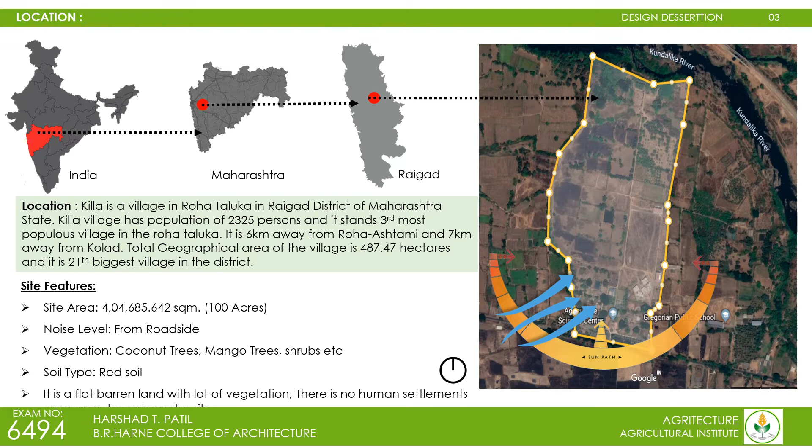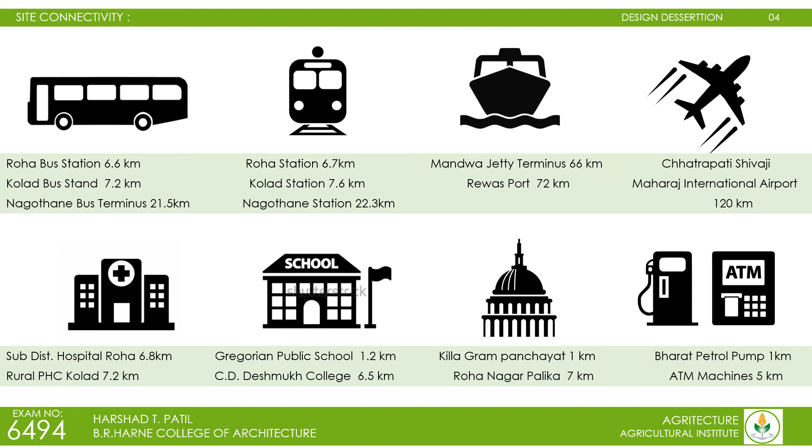Site features: site area is around 100 acres. Coconut trees, mango trees and gulmohar trees are found on site. It is a flat land with a gentle slope towards the river. Killa is well connected by roadway and railway. Roha bus stand is 6.6 kilometers and Kolad bus stand is 7.2 kilometers. Roha railway station is 6.7 kilometers and Kolad railway station is 7.6 kilometers.

Picture A shows the Roha Killa road which is covered with trees. In B, we can see the flat site with the trees on the edge. In C, we can see the Kundalika river. In D, the agriculture center beside the site. In E, the hall. And F, the poultry farming beside.

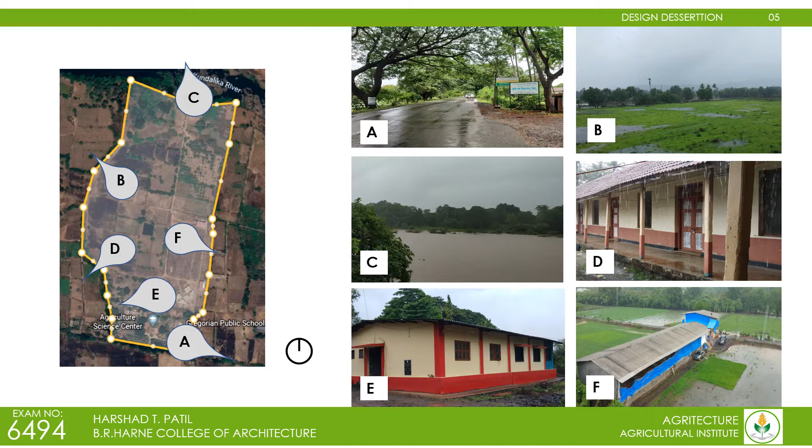Killa comes under the warm and humid climatic zone. Average summer temperature is 30.7 degrees Celsius. Annual rainfall is 3450 mm. Southwest to northeast is the wind direction. Red laterite soil is found on the site. SWOT analysis: plenty of water is the strength. Weakness is power supply and road networks. Opportunity is scope for development of education.

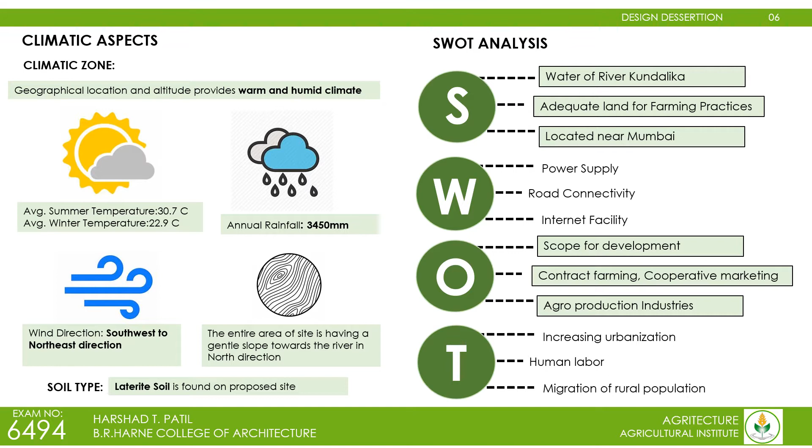According to the ICAR, Indian Council of Agricultural Research, 100 acres of land is needed to propose an agricultural institute. Of that, 33% is permissible for construction and 66.6% is permissible for farming. The 33% is divided into 70% built up area, 15% RG, 10% road and 5% amenities.

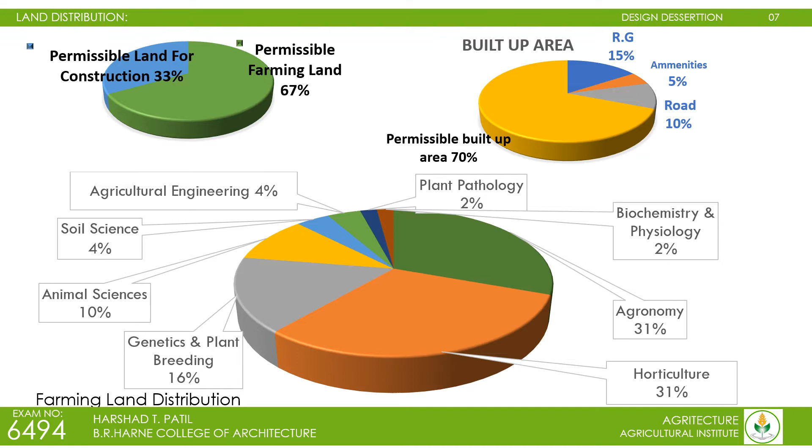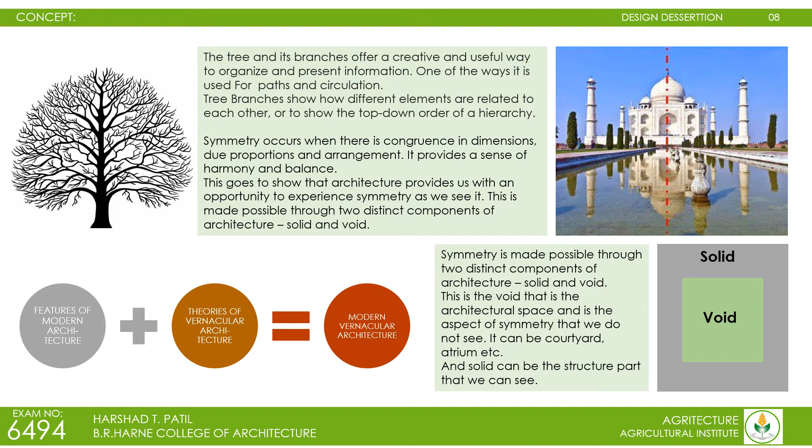Moving to concept: tree, symmetry and void. The circulation of food and water by means of capillary action in trees. The tree and its branches offer a creative and useful way to organize and present. The pathways and roadways depict the tree capillary action from roots to leaves. It shows that different elements are related and connected to each other. The roadways and structures are proposed in symmetry using voids. Hence, modern vernacular architecture has been proposed.

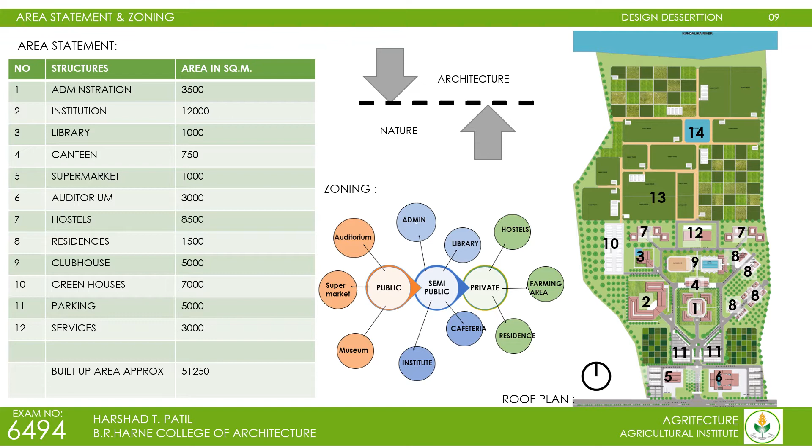Total built up area is 51,250 square meters. Zoning: the site is divided into three parts: public, semi-public and private. Public areas are auditorium, museum and supermarket. Both structures possess different entry exit points to avoid traffic congestion. The central road is the main road which takes us to the semi-public and further to the private areas of the site. The semi-public and private areas are well segregated by farms and parking spaces. The semi-public places consist of administration, institution, canteen, library, and the private spaces consist of hostels, residences, clubhouses, greenhouses, and the farms.

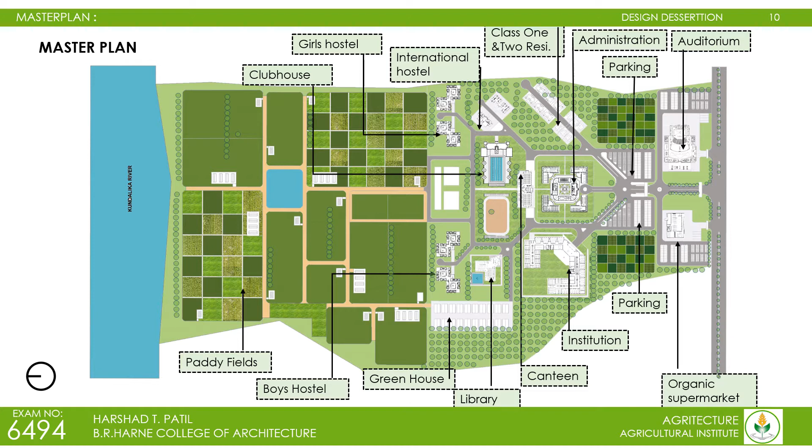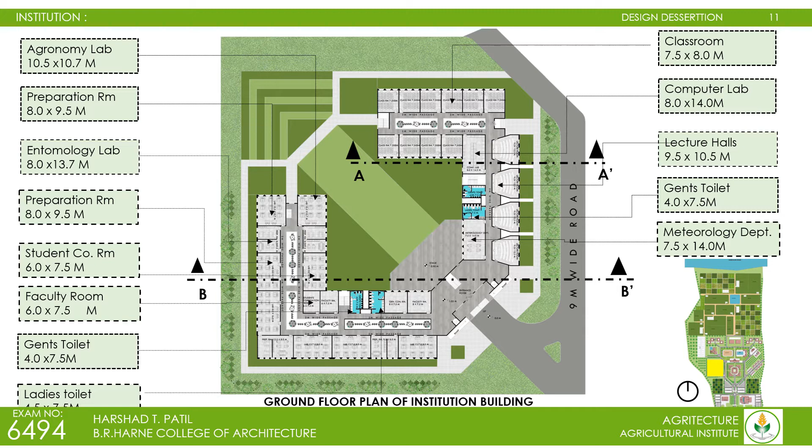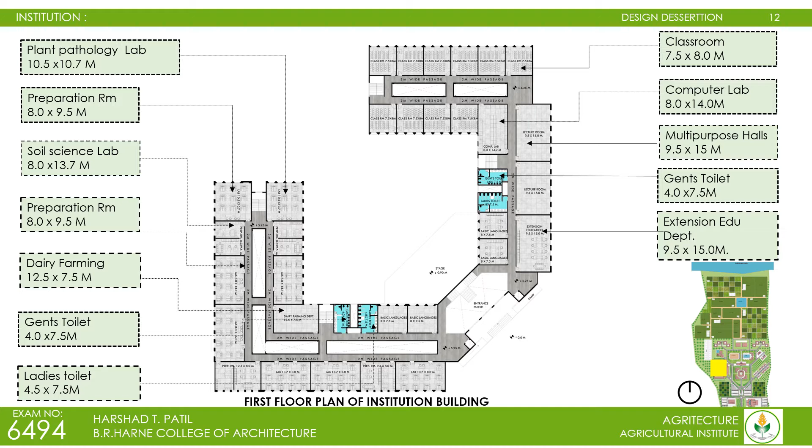Institute: it is east-west oriented with a grand double height entry at southwest. It is a ground plus one storey structure, covering about 12,000 square meters. The institute is composed of labs, classrooms, lecture halls, etc. A courtyard and central plaza have been carved out and serve as a multi-purpose area. Classrooms are proposed on the northern side with external treatment to avoid harsh light. Cross ventilation can be seen in the spaces. The lecture halls are replaced with multipurpose halls, and the extension education department has been added on the first floor.

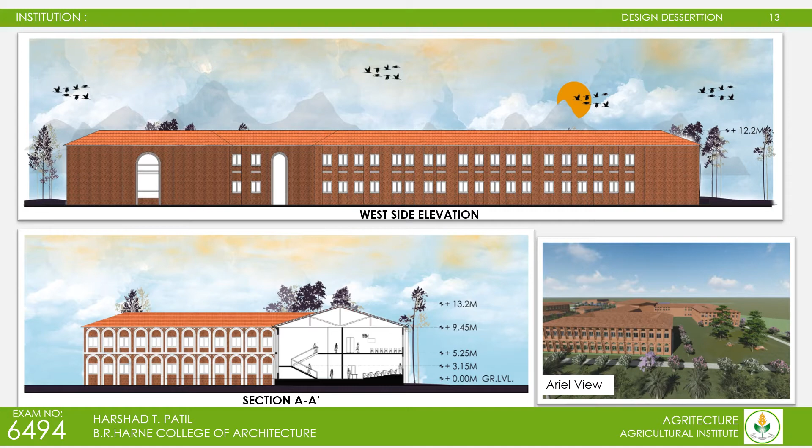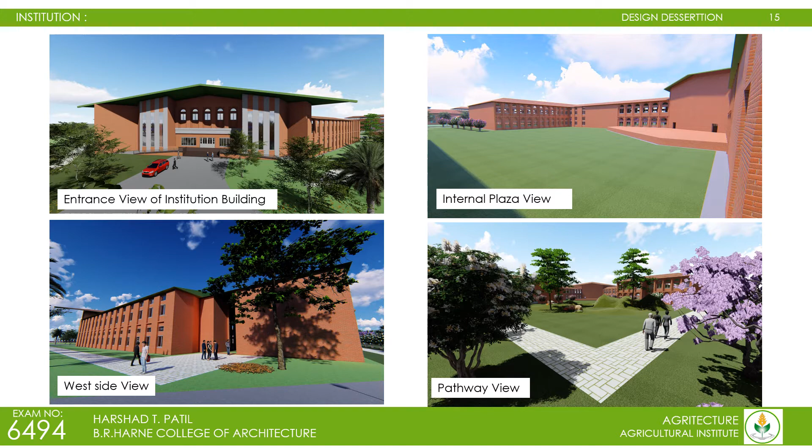It has been proposed on the central part of the site, the head of the institute. It covers about 3,500 square meters of area. It has a main tower type structure surrounded by 4 substructures. It is north-south oriented, parallel to the main highway. A courtyard has been carved out of the main building. The substructures are well connected with pathways, and the admin block is accessible on 3 sides by pedestrian walkway and 1 side by roadways. It is a ground plus 1 storey structure. It is symmetrically designed. Radial symmetry can be seen.

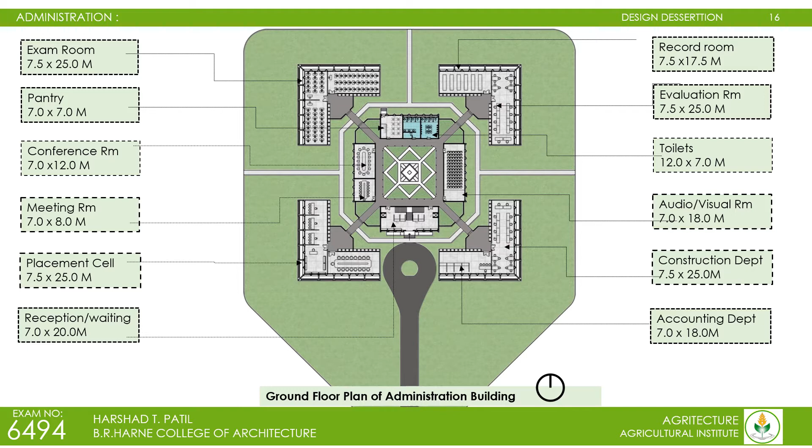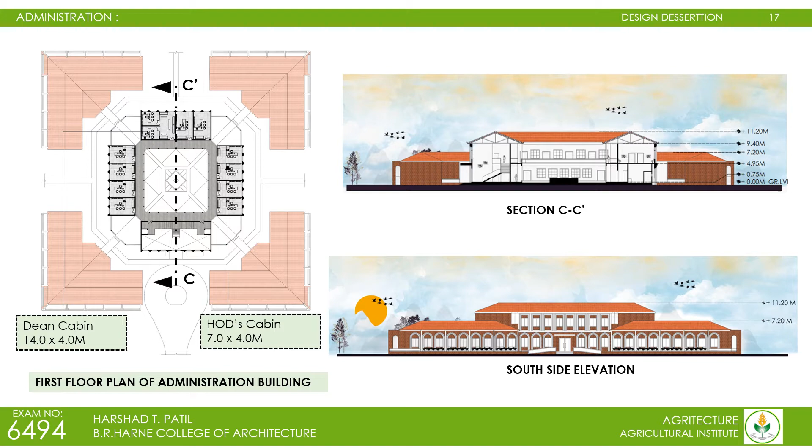Canteen is the next building, located centrally on the site. It is symmetrically designed. Lateral symmetry is seen, so it can be accessed from the east and west directions, with 2 entry and exit points. Outdoor seating has been provided in the outskirts with the landscape.

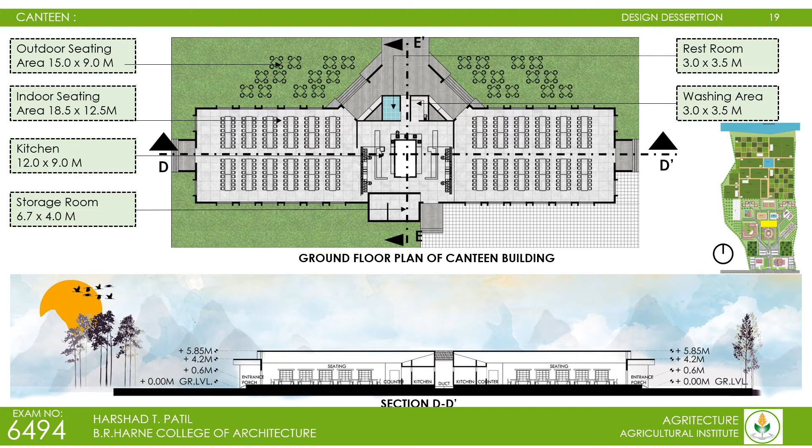The canteen covers an area of 750 square meters. It is a ground floor structure designed for about 600 students. It works on solar and biogas fuel. Traditional types of roofs have been proposed, and the chamfer at the end gives aesthetic beauty to the elevation. An enclosed duct has been given in the kitchen, which works as a natural chimney.

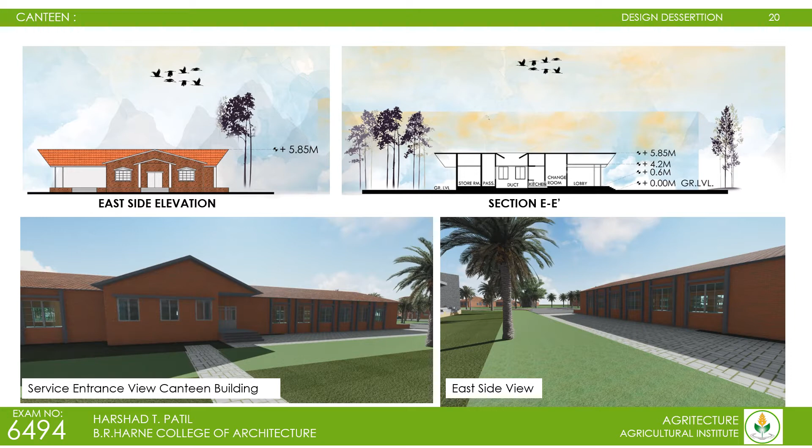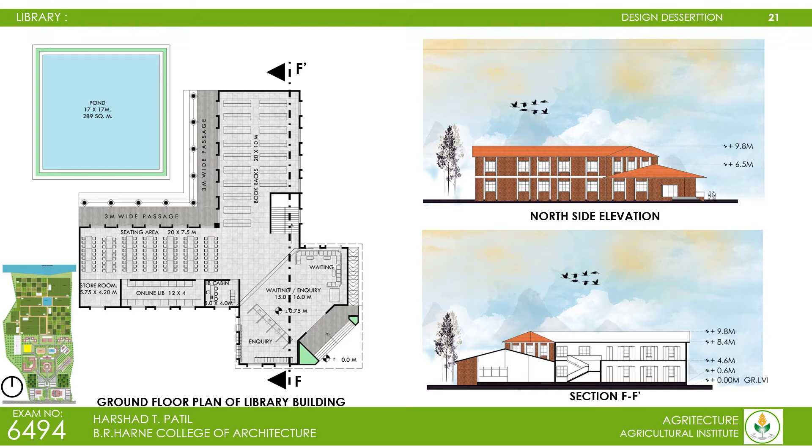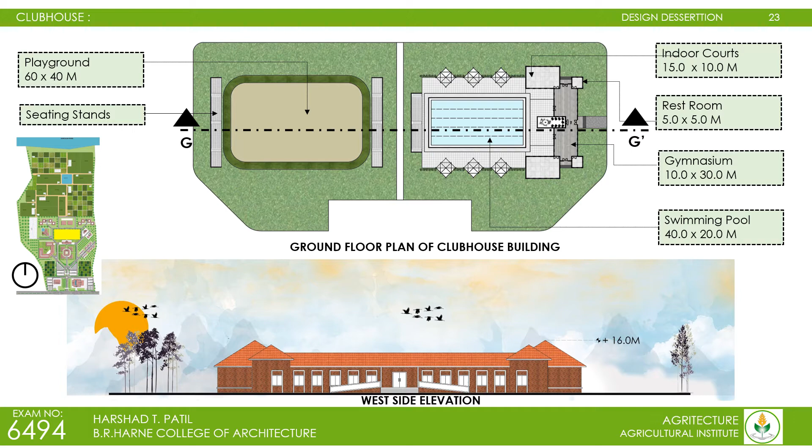Clubhouse is centrally located just behind the canteen building. The total built-up area of the clubhouse is 1000 square meters. It is an east-west oriented ground floor structure. Indoor games, court, and gymnasium have been provided. Seating stands have been introduced in the playground and swimming pools. Overall, to refresh the mind, the clubhouse has been designed in the space. Section GG shows us the stands, the swimming pool, and the clubhouse. Down there is the pathway view, the playground and stand view.

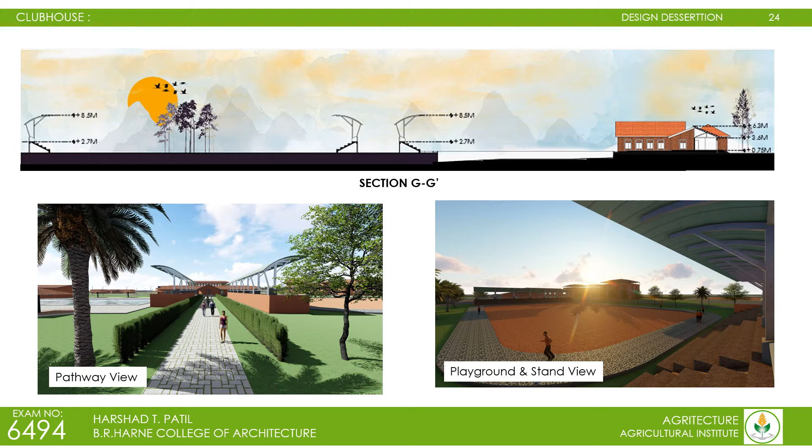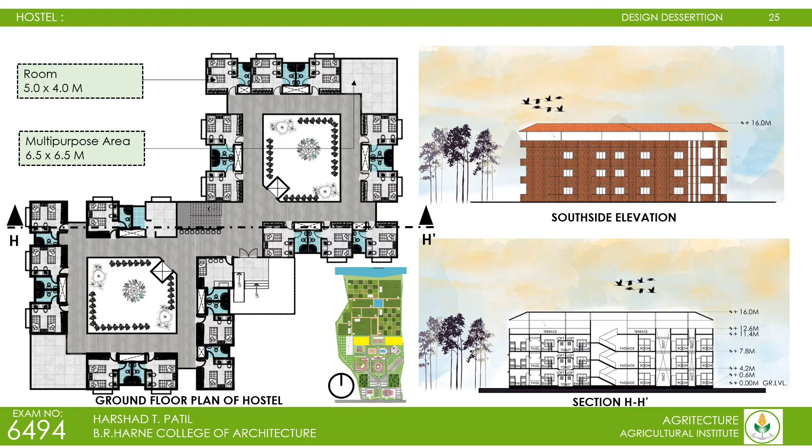Hostels are located at the middle of the plot and are the last areas to be constructed. Hostels are at a secured and private part of the institute. There are 2 different hostels, one for boys and the other for girls. Hostels are at a safe distance from each other. It is a G+2 storey structure. It covers about 4000 square meters area. Courtyards are carved out of the 2 solid blocks and well connected with a connecting passage. South side elevation and section HH.

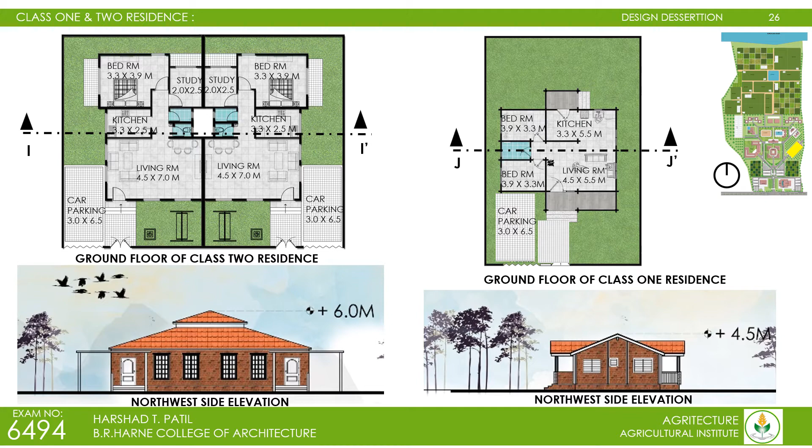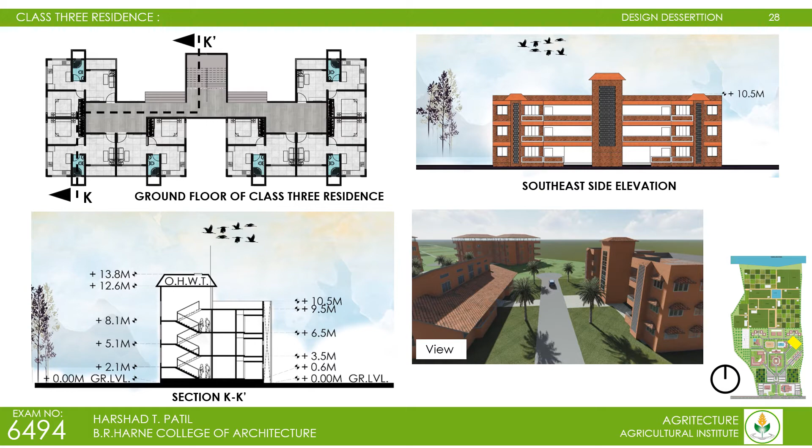Class 3 residence. It is proposed in the east direction in front of the international hostel. The building is designed with lateral symmetry. It is a ground plus 2 structure of 1 BHK flats. It is an RCC structure of area 400 square meters. We can see the southeast side elevation, section KK and the overall view of the building.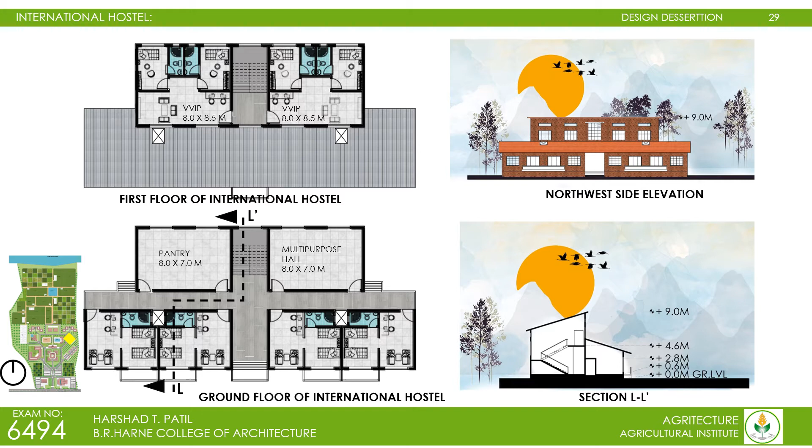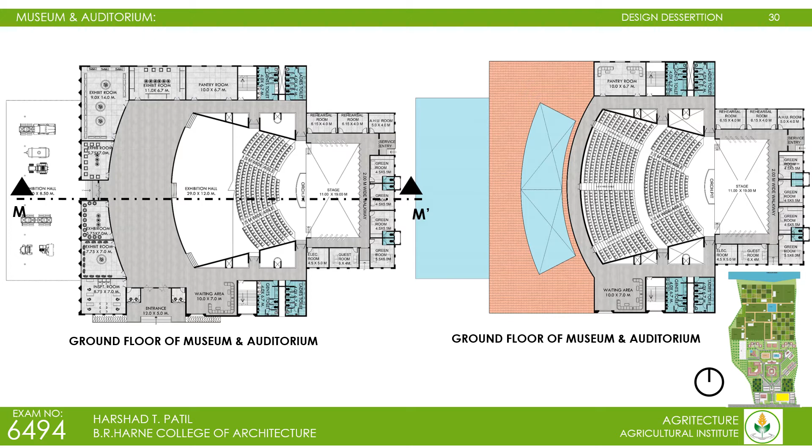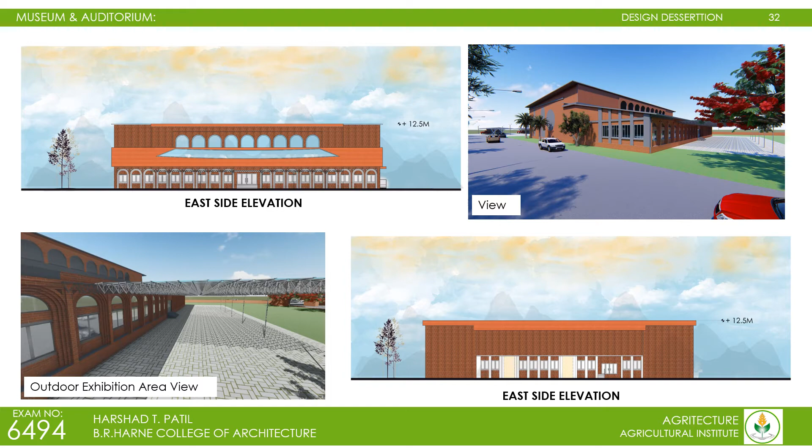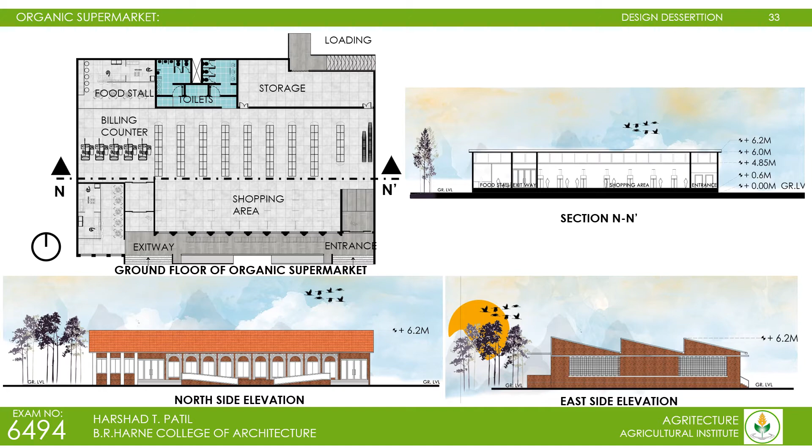Organic supermarket. It is located in the public zone. It also has separate entry and exit points. It is north-south oriented with the main entrance on the southern side. The organic supermarket covers an area of 1000 square meters. The north side roof has been designed with jali walls. The side section and the side elevation. The north side elevation, the east side elevation, section OO and section PP of the site.

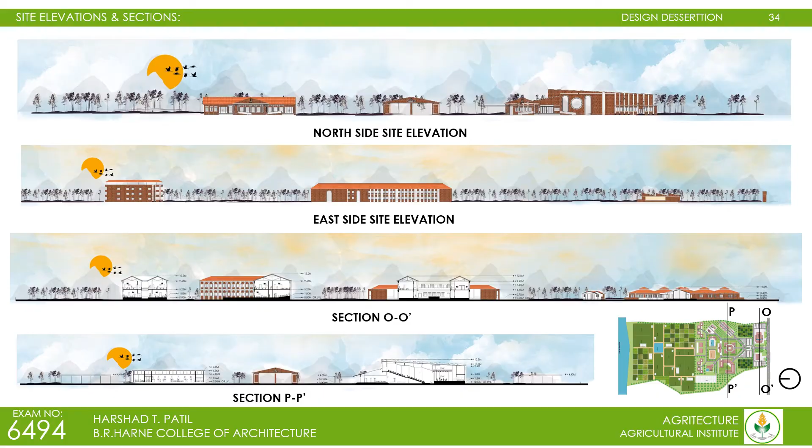On the east and west sides, vertical fins are beneficial to avoid harsh sun, and on the north and south, horizontal overhangs with wide projection are beneficial. External treatment has been done on the southern side. More openings are provided on the northern side in the project. Traditional techniques like the jali wall have been introduced to pass air through the structure. It controls airflow, light and temperature. It also prevents glare from east and west and improves the building aesthetics. Cross ventilation is important in a warm and humid climate for exchange of air, which improves indoor air quality.

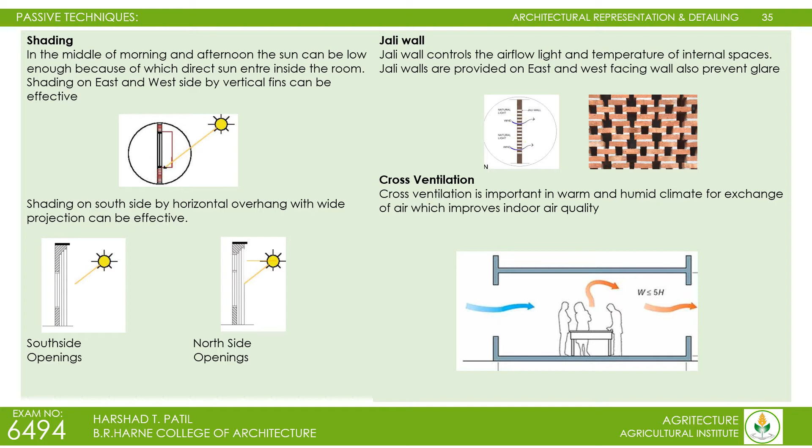The site comes under warm and humid climate, characterized by heavy rainfall and high humidity. The design proposed keeps ventilation, sloping roof, and courtyard in mind.

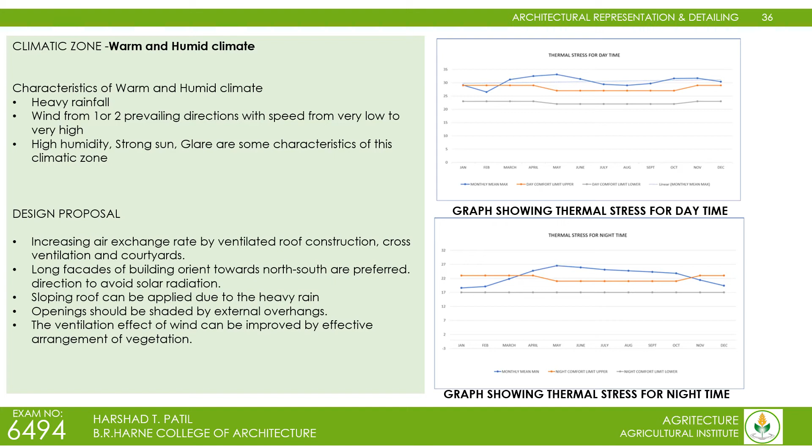We studied the Mahoney table and found out the thermal stress for daytime and night time. The graph shows us the stress for daytime and night time.

Pergolas have been provided on the pathways, forming a shaded pathway. It is proposed to use renewable material, mostly MS steel.

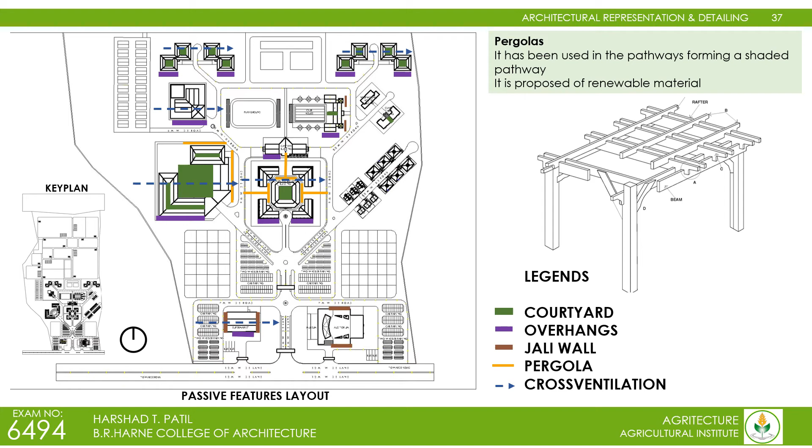Landscape is an important element altering the microclimate of the space. Selecting the proper variety of plantation and placement helps reduce heat gain and acts as a buffer zone.

More trees have been proposed for comfortable shadow near the structures. Neem tree has been proposed for pure oxygen near the structure. Mango plantation has been done for revenue generation, and the foliage gives shadow to the surrounding. Coconut trees have been provided on the edges of the plot to create aesthetical beauty.

Then rubber farming is done, and rubber can be produced. Supari tree is an important commercial crop in that area.

Load bearing construction is suitable for the project as there are no high rise buildings proposed; buildings are either ground or G+1 structure. So there is no huge amount of structural load, thus the system is economical for the scale of the project.

The hard strata in the region can be found at a depth of 1 meter, hence shallow foundation can be used. Stone foundation is used and brick foundation above that. See the section through the external wall and section through the toilet sunk.

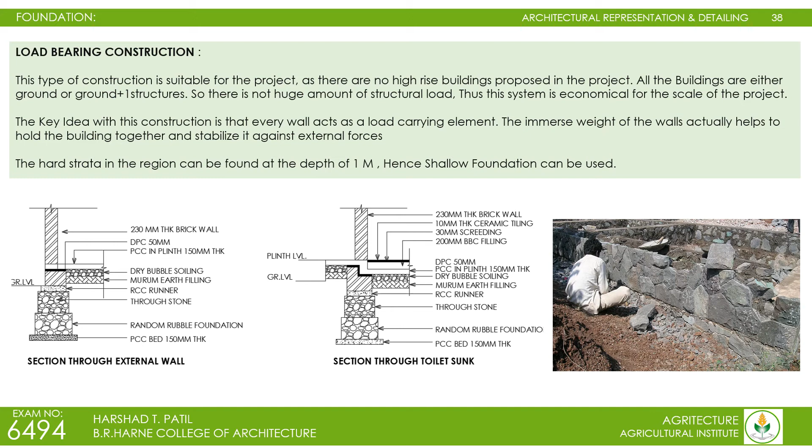Filler slab consumes less concrete and steel due to reduced weight of the slab. It also enhances thermal comfort inside the structure due to the heat resistance qualities of filler materials like Mangalore tiles and the gap in between them. Filler slab is used over all the structures.

North light has been proposed over the supermarket building. It can be used over a span from 20 to 30 meters; we have proposed 25 meters span. The glaze portion faces north for the best light.

The roof truss is a structural framework designed to bridge the space above the room and provide support for the roof. The proposal lies in the rural and local vernacular system of sloping roof adopted. The system is made of MS steel that is recyclable, and the rafters and purlins are of the same material, covered with Mangalore tiles. The maximum span of the Howe roof truss is 18 meters in our structures.

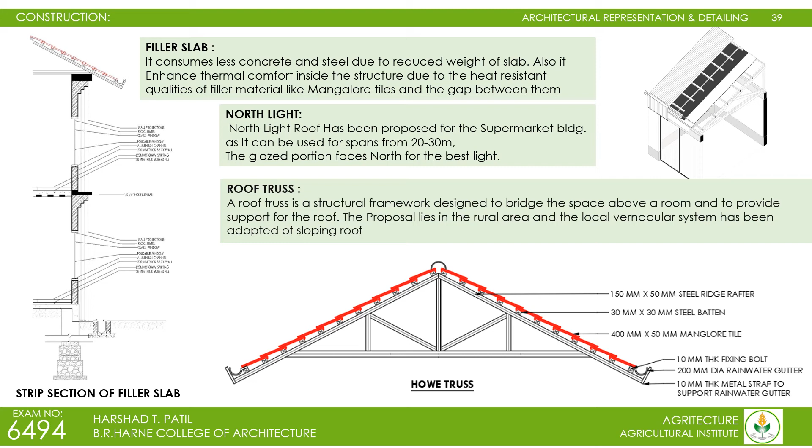Space frame has been used in the museum building for the outdoor exhibition area. It gives column free space, easy to dismantle, easy to transport and easy to handle.

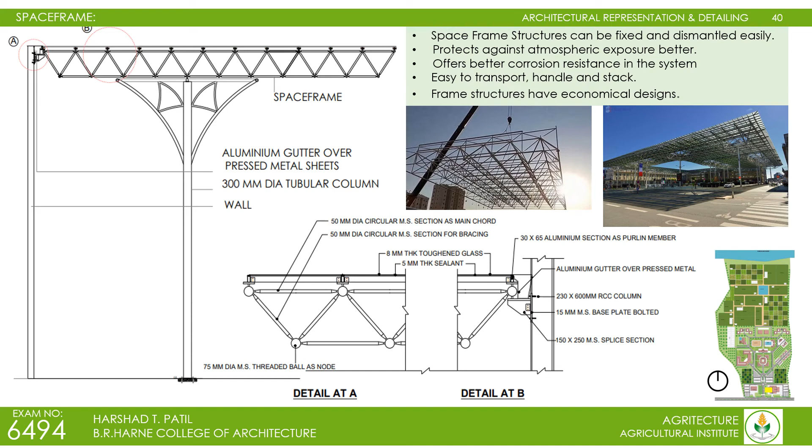Materials and availability: advantages of using mud brick. Mud brick is a versatile material and is available everywhere. It is cheap yet durable if properly used for construction, and it provides better insulation than steel.

MS steel is recyclable, allows speedy construction, and can be manufactured to desirable strength. Mangalore tiles provide ventilation especially in summer and add aesthetic beauty to the elevation. The black basalt rock is naturally available, recyclable, and has low production cost.

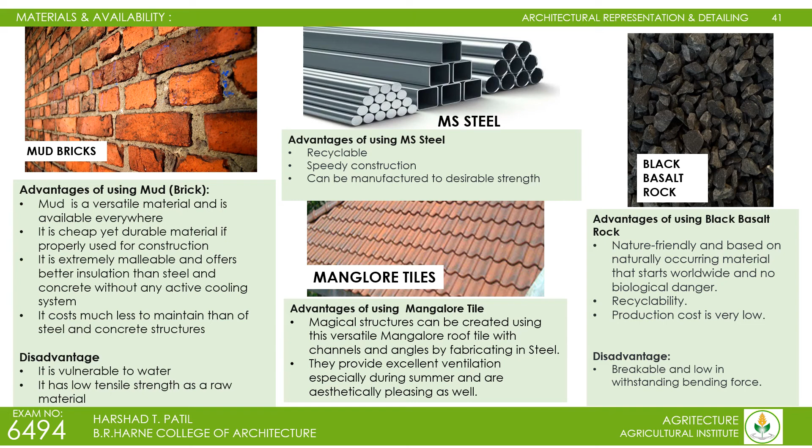We can see the water flow from the pump room to the structures, and the water flow from river Kundalika to the filtration unit, then to paddy fields, landscape, and ponds.

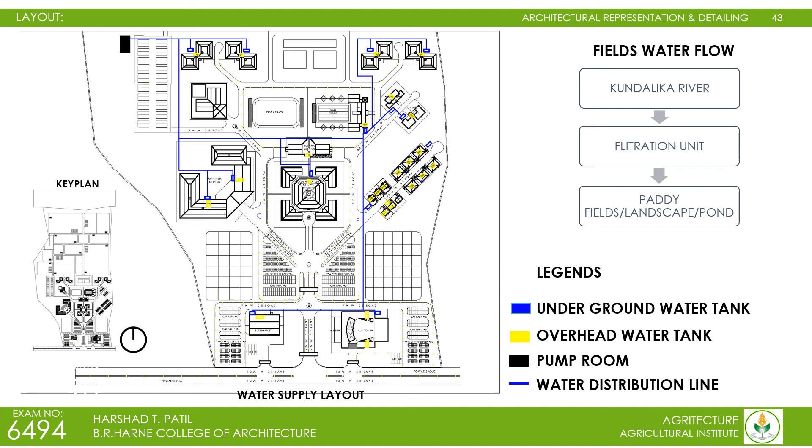Total water required is 1,97,000 liters over the campus, of which 96,000 liters of water is required for landscape.

The section through grass pavers: grass pavers are provided in the parking spaces and pathways which percolate the water. The section of the pathway side drain.

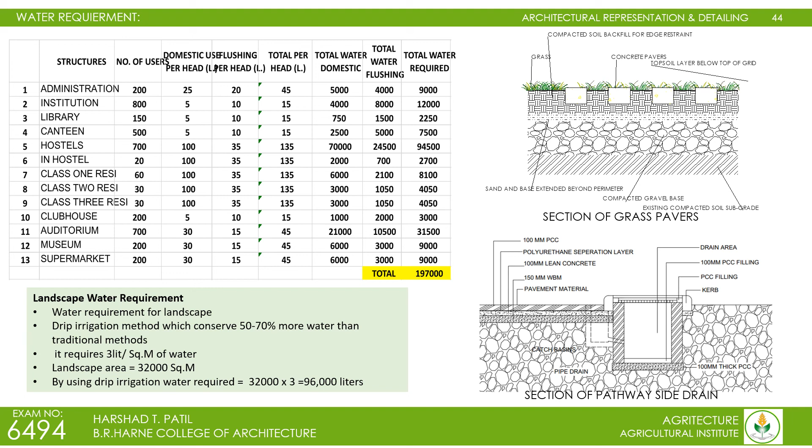Rainwater harvesting layout: we can see the natural surface water flow in the northern direction towards the river, the catchment area, and the water tank.

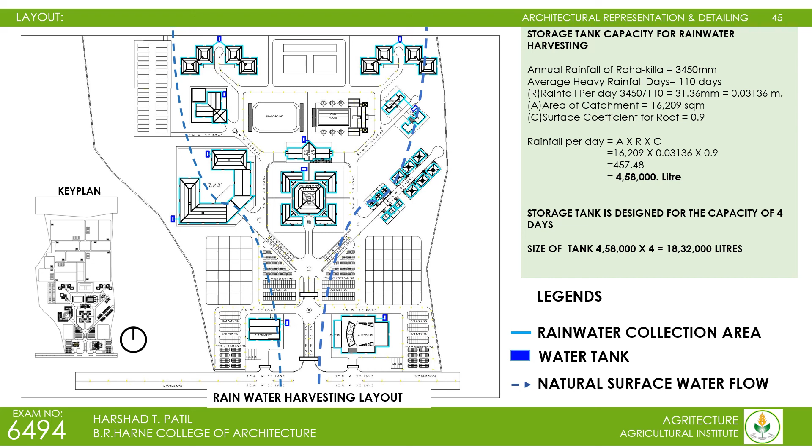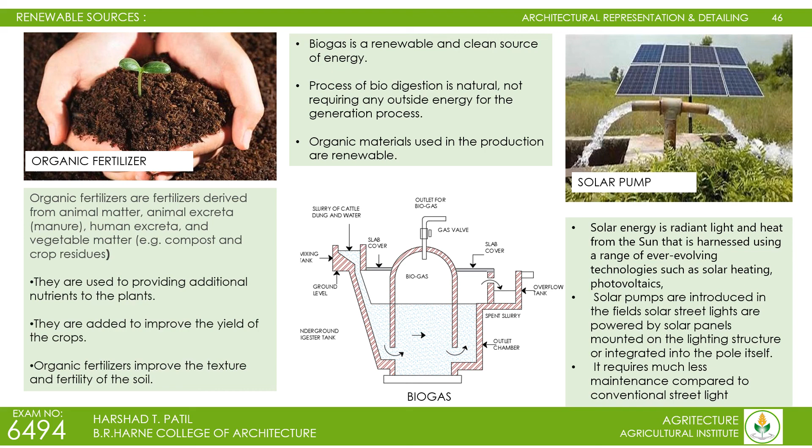Solar lights are proposed, though they require much less maintenance. Solar panels are provided over the parking sheds. A total of 413 panels are required to generate 579 kilowatts of energy.

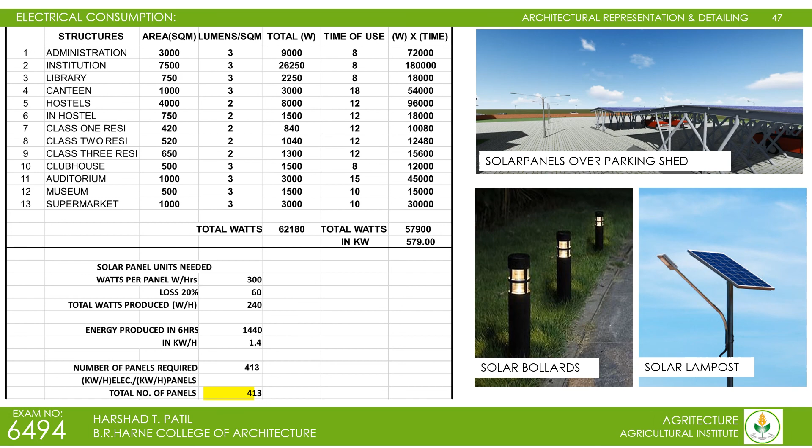Electrical layout: the main electrical supply comes to the site through the substation, then the transformer yard, then the electric meter room, and the power backup.

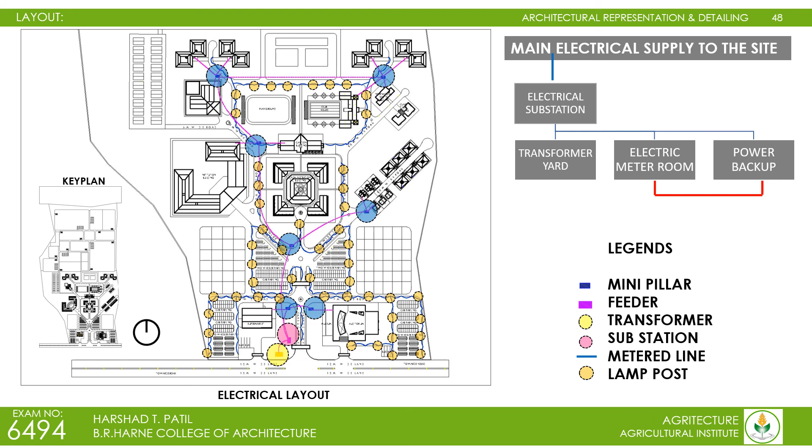Drainage layout: we have proposed the DEWATS system, the septic tank, then the biogas settler, the anaerobic baffled reactor, anaerobic filter, the planted gravel filter, and the pond system.

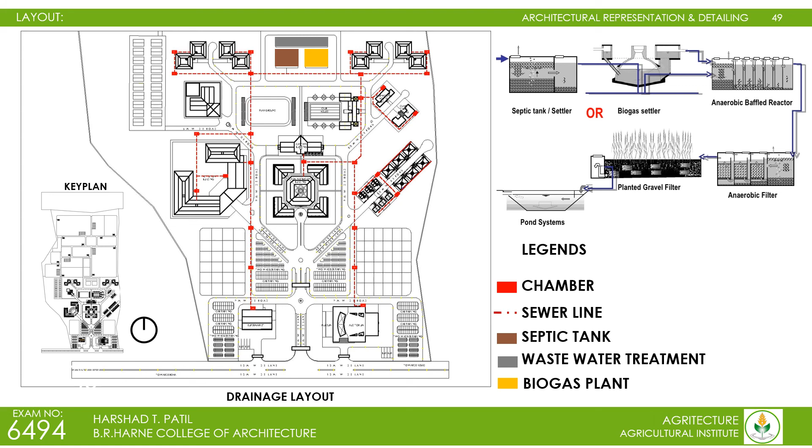Hence, this project proposal gives food production, educational awareness, job opportunities, strong farming communities, less carbon footprint, and entertainment and revenue.